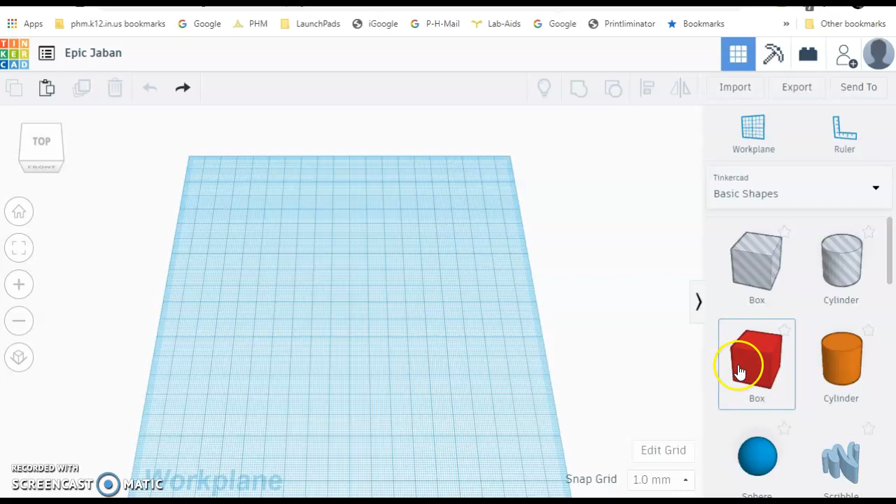I'm going to pull in a box, a rectangular prism, and stretch it out here. Notice these numbers that tell you the dimensions. So I'm going to go here like that. 90 millimeters would be 9 centimeters.

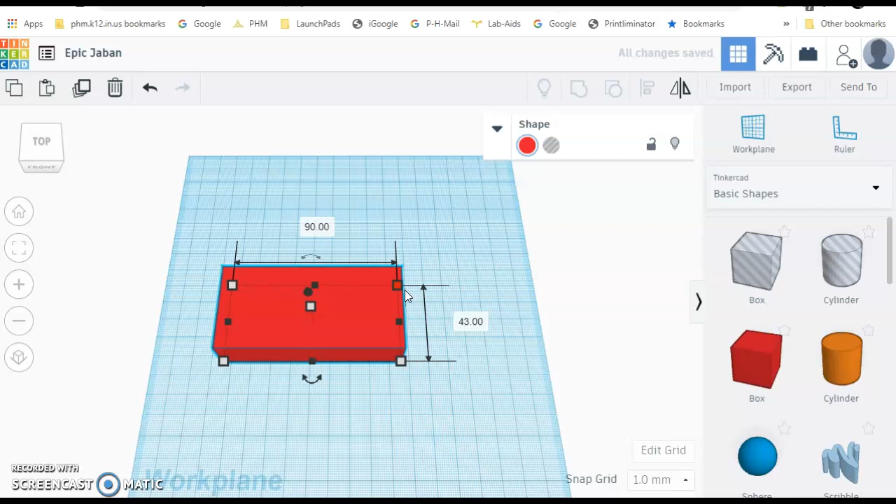And I'm going to stretch this out a little wider here, say 40, doesn't have to be precise. 43 millimeters would be 4.3 centimeters. I'm going to tip this up, shrink it down to say 7 millimeters tall.

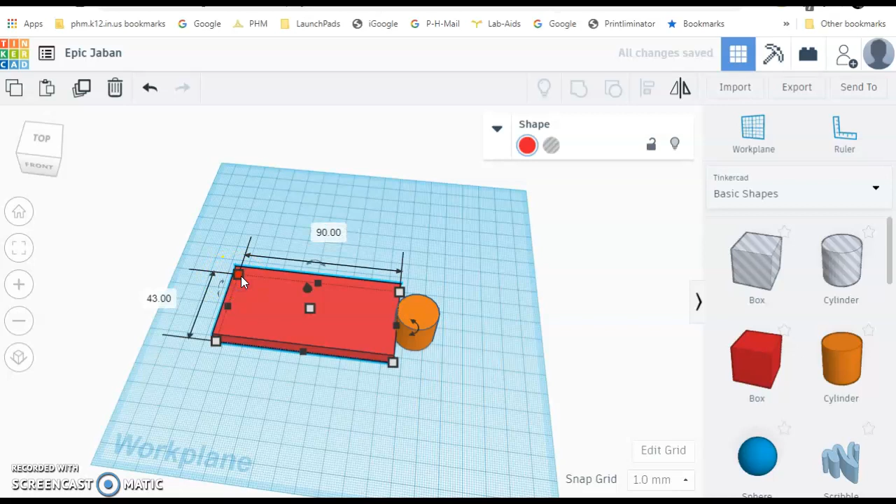And I want to have a rounded edge here, so I'm going to bring in a cylinder. This was 43 millimeters, so I'm going to do the same thing to this. Stretch that — oops, I stretched it up, I meant to click that. Oh, I didn't, huh. Stretch that out to 43 millimeters there, so it's about the same.

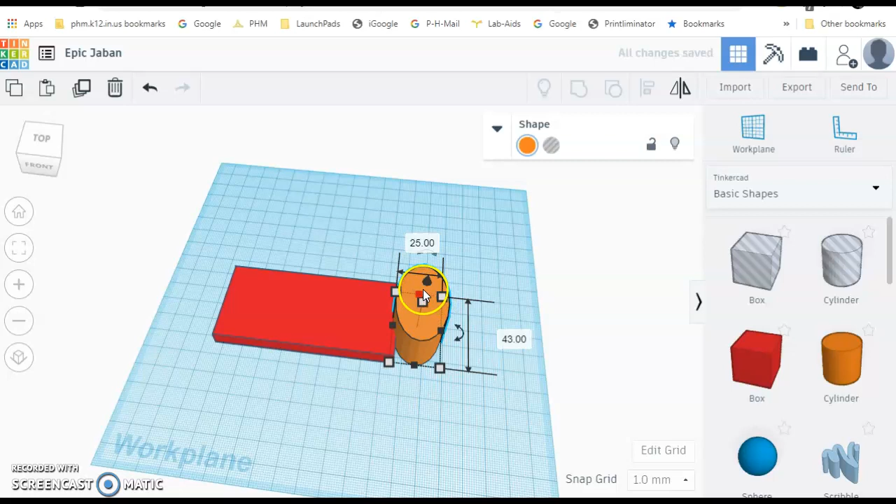I'm going to stretch it out this way a little bit, shrink it down there, make sure that's the same height. Is that 8? That was 7, so I'm going to make this one 7 as well to make it the same.

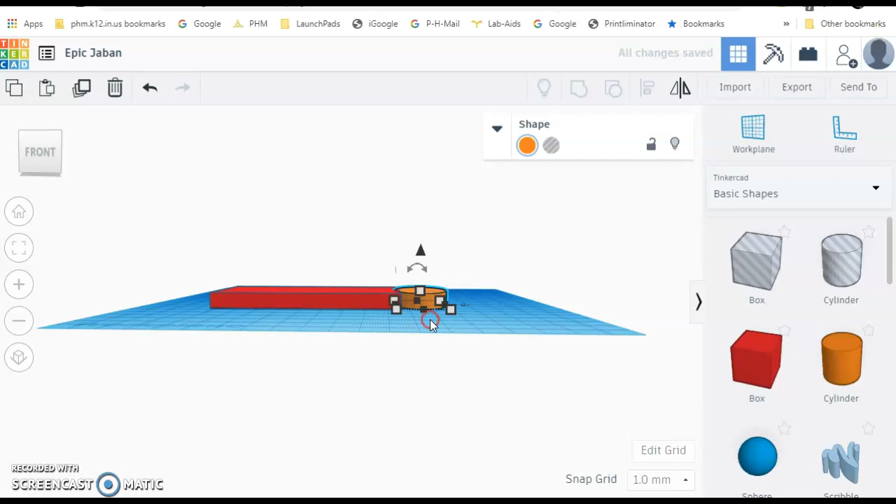Alright, and I'm going to join these together, line those up like that. Let's look here — so those edges are the same, and then I'm going to stretch that out a little bit.

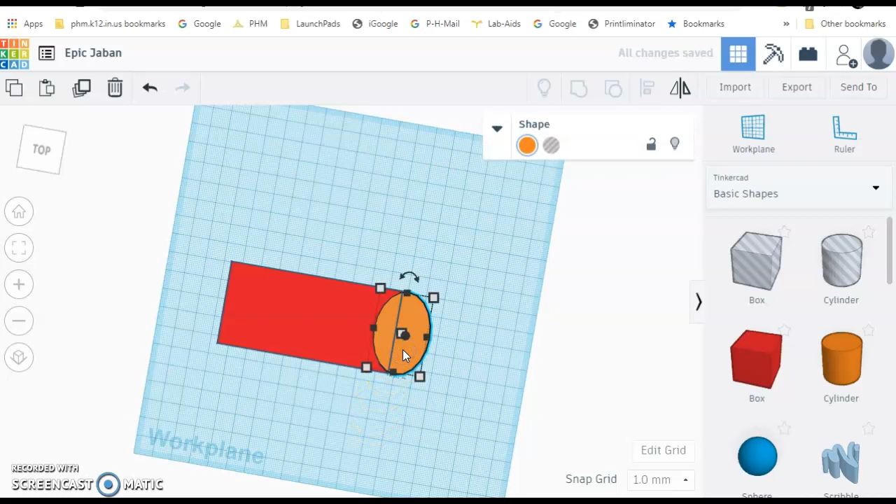I want to move it in just a tad, a little bit more. And then I'm going to use the selector tool, so I just turn it, use the selector tool to make those one thing.

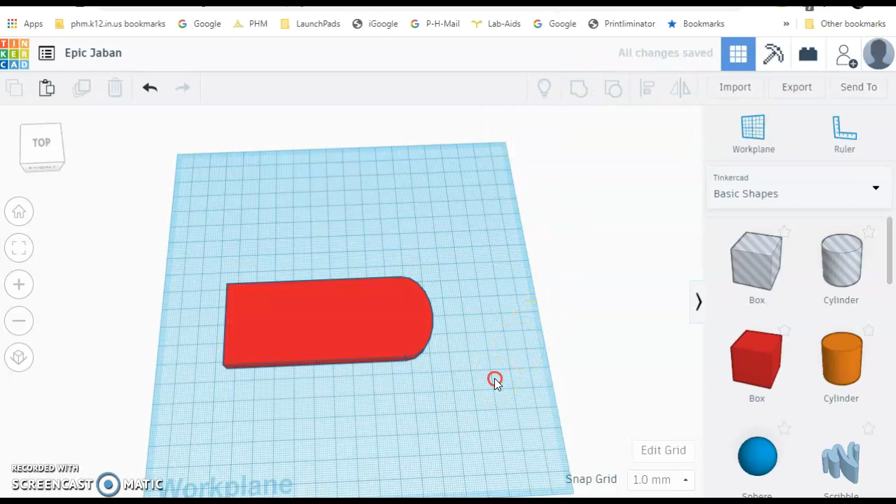Alright, so you see you have a rounded edge there, and I'm going to go ahead and put a hole in there. By the way, if I didn't like how I did that, I could undo it. But I'm going to put a hole in there, make that hole smaller.

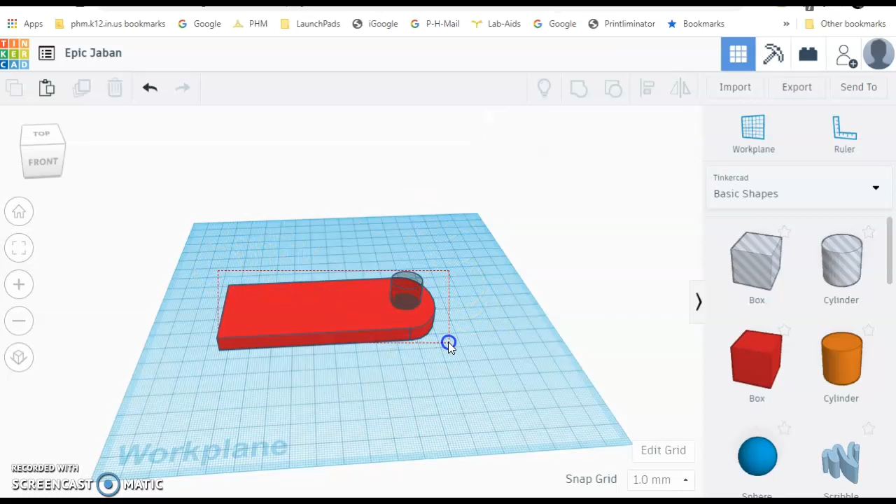Looks good, and I'm going to turn that into a hole. So I click on that and click on the hole symbol on the shape selector, shape tool, and I'm going to put the selector around there, band selection tool, and I'm going to join those together to make that hole.

So now I've got a hole in it, and then I can just scroll down here to text, and I can put the text right on it, or I can put it here and mess around with it. So I can change the size of that text.

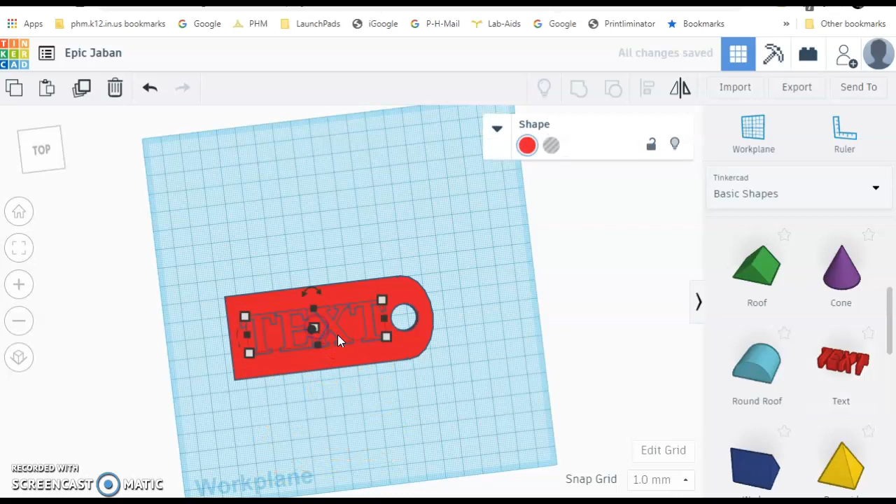Go back into the shape menu here, and for the text I can change the text. I can change it to PLTW, or I can change it to something else, like sample. I can keep it all caps if I want, or I can make it lowercase.

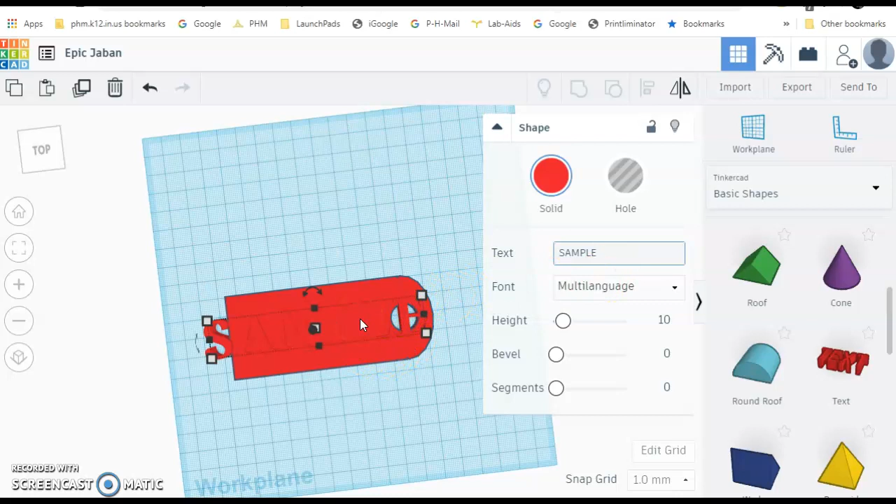That would be too big to fit on there. I can change the size of the text, or I can change the size of the keychain itself to fit what I want — change the size of the text.

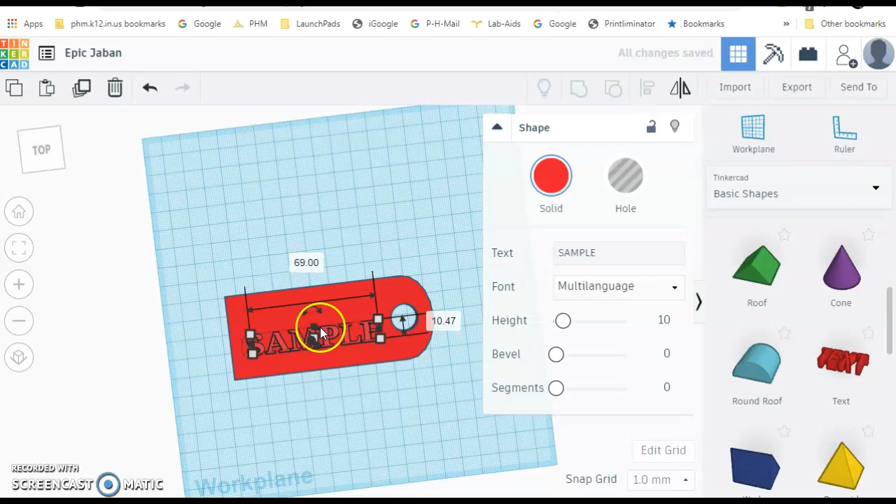I can put more words on there. I can put another set of text, move this up here, and I can put some more text on and resize that a little bit, and move it over, kind of center it, whatever I want to do.

Or I could put an image on there, I could put some shapes on there. You can play around with it, but it's a simple way to make a little luggage tag, and it doesn't have to be the same size as this. I was just playing around with it to give you an idea.

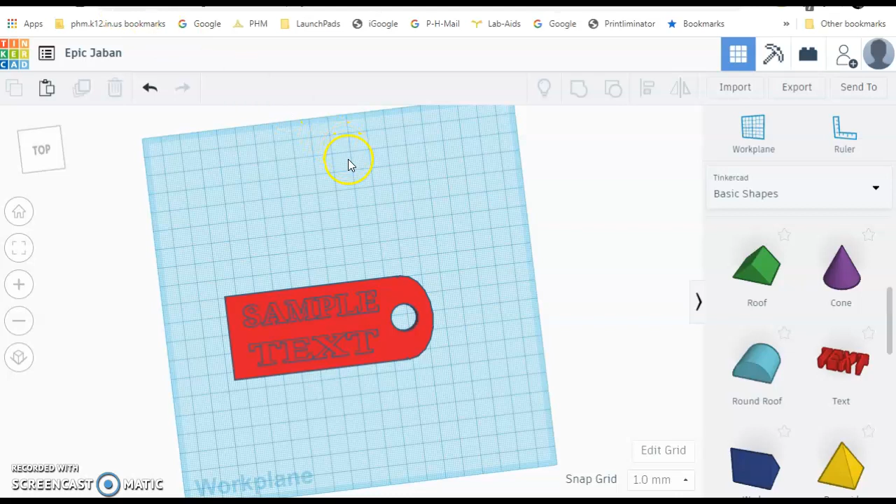Oh, and of course I would want to group that all together as well — take a look at it from all sides, make sure the text isn't floating above it or extending off the edge. And I would use the band selection tool, make sure I've selected all the text, and then group it all together so it's all one object, all connected together.

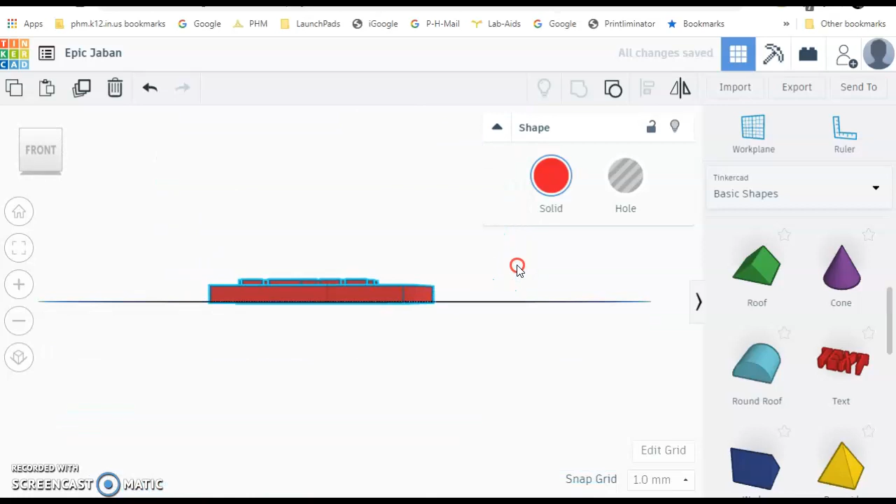And then I'd simply export that and add that to one of the flash drives to submit.